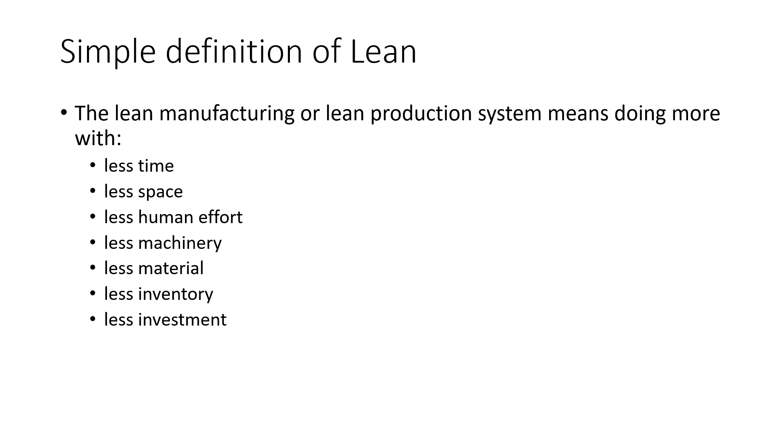So the key principles of lean: value. You define value from the customer's perspective. You identify the value stream. Value adding activity, eliminating waste, which is muda. It's a Japanese term, which means waste. So we're just trying to find ways to get rid of waste.

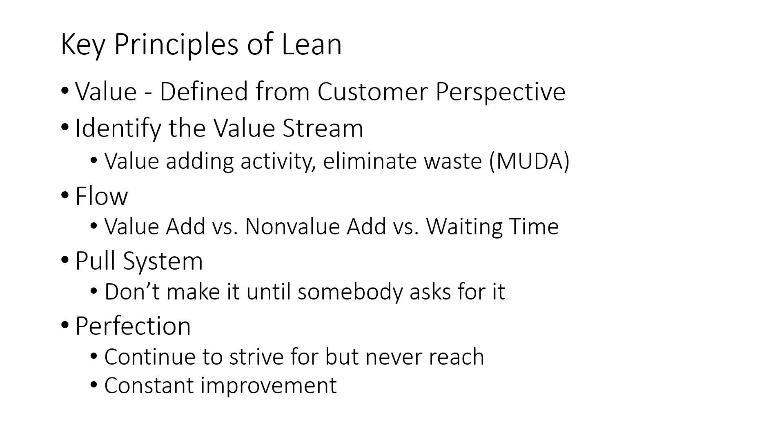Flow is how things move throughout the process. So you're looking for value add versus non-value add versus waiting time. Pull system, don't make it until somebody asks for it. And then perfection, continue to strive for it. You'll never reach it, but you're always in this constant continuous improvement Kaizen process where you're just always trying to get better. You're striving for perfection.

So just some differences between the conventional way of thinking and the lean manufacturing way of thinking, or the Toyota manufacturing systems way of thinking. Under the conventional, you're just trying to make numbers. You're trying to make as many as you can. You're in a push system. You just make more and more. You do what's ordered. The leader's the boss, so you do what the boss says. If there's standards, you're not sure where they are or if they're followed, or they might not even be clear.

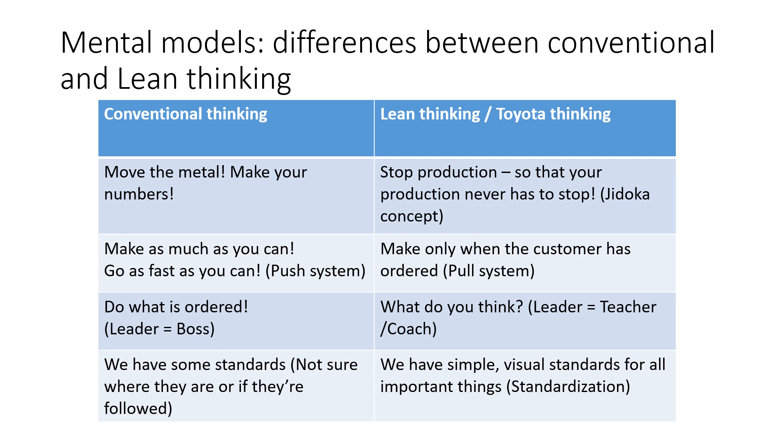Under lean, you're able to stop production so that your production never has to stop. You only make what the customer has ordered. You're in a pull system. So you may be asked, what do you think? The leader's a teacher. He's a coach. He wants your ideas, or she wants your ideas. And you want standardization, but you want the standards to be very simple, visual, so it's very clear and everyone can understand them.

So again, just the differences continued. Under conventional, engineers and other specialists create standards. They'll tell you what to do. You do what you're told. You don't want to get caught holding the bag. If there's a problem, you don't want to be the one that's around that problem. You don't want to be the one creating scrap or quality issues or whatever. Only grunts go to the shop floor. You won't see leaders on the floor, and it's just do. You do what you're told.

So again, under lean thinking, people closest to the work develop the standards. Who knows it better than the operator? So you want the operator involved. Involvement is very, very key. You want to make the problem visible. You want to go to the floor and see for yourself. If there's issues, you're not going to know unless you can see the problem for yourself. And then you're always in this PDCA cycle. You're in the plan, do, check, and adjust cycle.

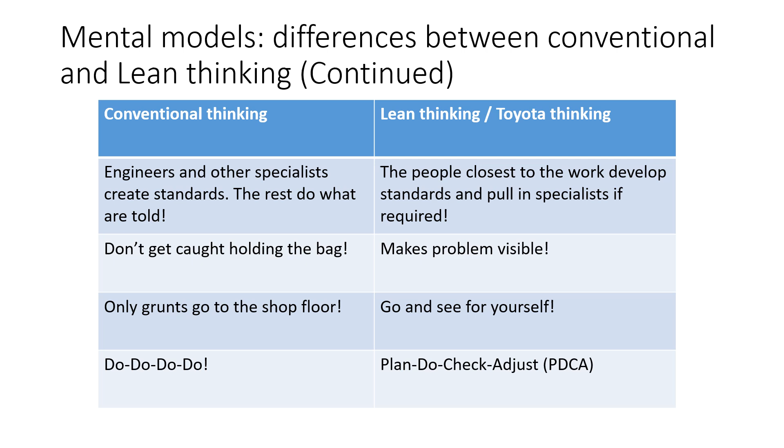So the basic image of lean production: the foundation of the lean system is stability and standardization. The walls are just in time, which is delivery of parts or products, and Jidoka, automation with a human mind. The roof, or the goal of the system, is customer focus. You want to deliver to the customer with the highest quality, with the lowest cost, and the shortest lead time. And the heart of the system is involvement. Everyone has to get involved to be successful. So flexible, motivated team members are always trying to find a better way.

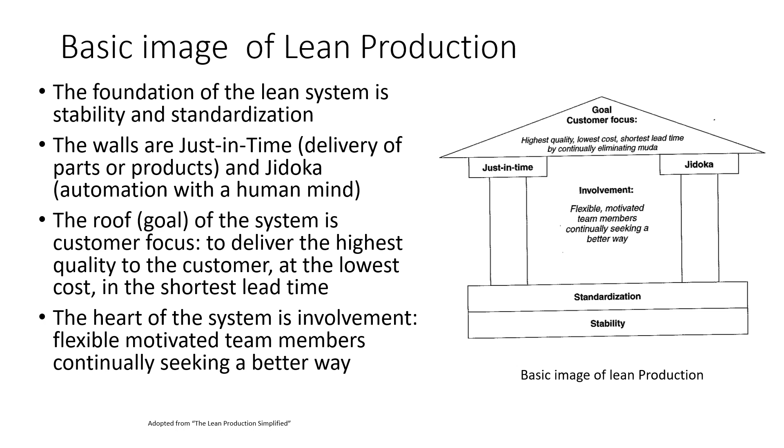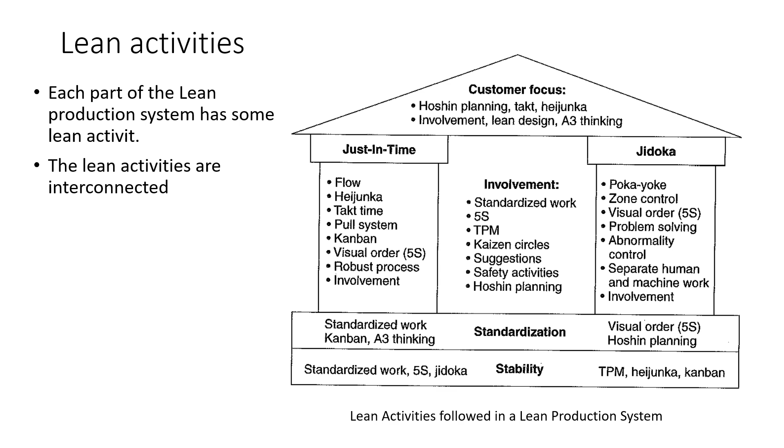So for lean activities, each part of the lean production system has some lean activity and they're interconnected. So again, customer focus has hoshin planning, takt time, Heijunka, there's involvement, there's lean design. Just in time, there's flow, Heijunka, takt time, pull system, Kanban, visual, everything's visual, 5S. In the heart, involvement. Standardization, 5S, TPM, Kaizen, suggestions. Jidoka, Poka-yoke, zone control, visual orders, which again, 5S. So you can see how everything is very much interconnected.

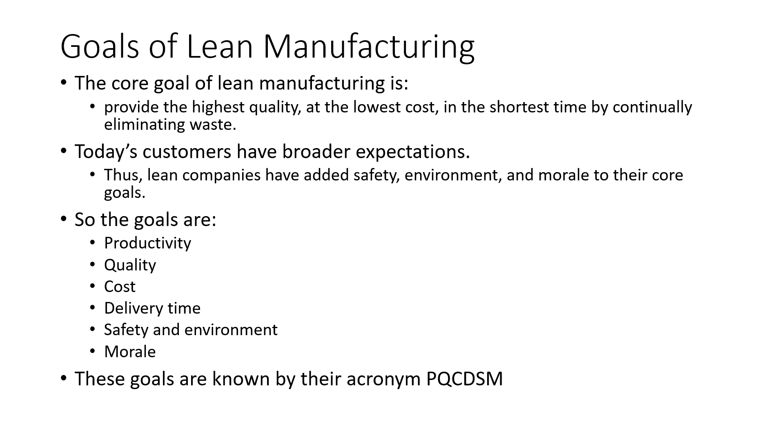So the core goal of lean manufacturing is to provide the highest quality at the lowest cost and the shortest lead time by continually eliminating muda or waste. Today's customers have broader expectations. Therefore, lean companies have added safety, environment, and morale to their core goals. So goals are productivity, quality, cost, delivery time, safety and environment, morale. It's most commonly known by an acronym PQCDSM.

So regarding customers, you need to know your customers, your external and your internal customers. You need to be able to talk to your customer. And you need to identify what your customer's value is and measure the delivery of the value to your customer.

So when it comes to customers, you need to make sure that you don't assume that you know everything about the customer. Don't ever assume that you already know what the customer wants. Don't assume that marketing or salespeople know the customer. Customers' requirements will always change. They'll change over time, and we need to monitor what they always need, and we need to track that.

And you need to understand why the customers do what they do. You need to know what drives them. You need to ask them directly, and don't assume you already know.

So ask the customer 3 questions. What do you want to know? Who do you want to know it from? And what are you going to do with the information? If you can't answer 3, you should not bother asking 1 or 2.

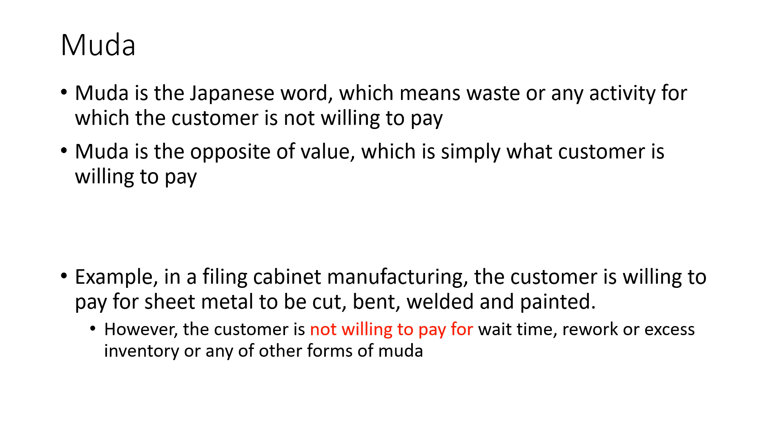So what is muda? Muda is a Japanese word which means waste or any activity which the customer is not willing to pay for. It's the opposite of value. Customers will pay for value. So an example, in a filing cabinet manufacturing, the customer is willing to pay for the sheet metal to be cut, bent, welded, and painted. However, they are not willing to pay for wait time, rework, excess inventory, or any other forms of muda.

So lead time is the time between the customer placing and receiving the order. So any delays could increase lead time. So lead time is equal to processing time plus retention time. Lead time increases the retention time, which far exceeds processing time in most manufacturing operations.

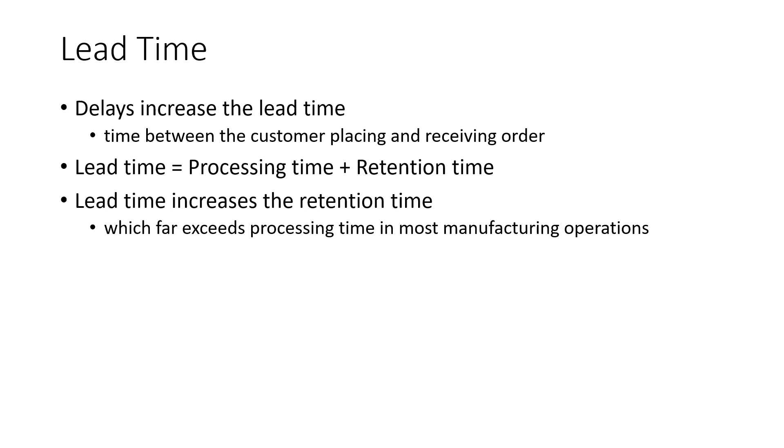So overproduction means making things that don't sell. Examples: building and maintenance of large warehouses, extra workers and machines, extra parts and materials, extra energy, oil and electricity, extra forklifts, tow trucks, pallets and skids, extra interest payment in the loans, and hidden problems.

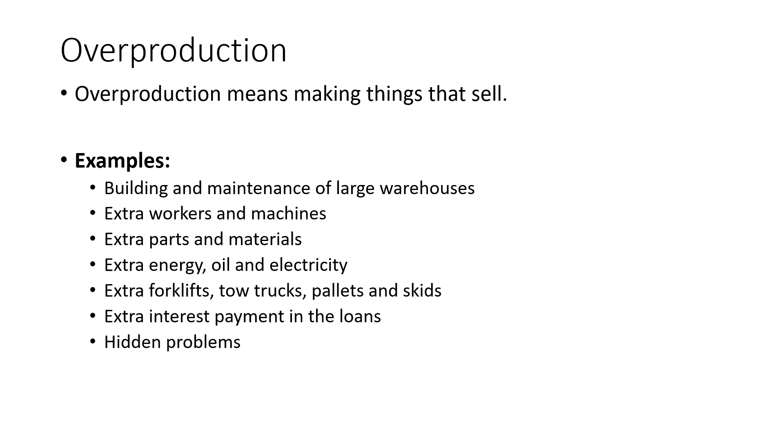So you can see in the chart the summary of all the different types of waste. There are usually 7 types of waste listed, which is overproduction, transportation, motion, waiting, processing, inventory, and defects.

Some people even list an eighth waste, which is not involving the operator or getting their ideas from the operator, and leaving good ideas on the table. So that's also considered a waste in a lot of lean books or articles that you may read. But you can just read along, go through the table and see the definition of each, examples, and causes and countermeasures.

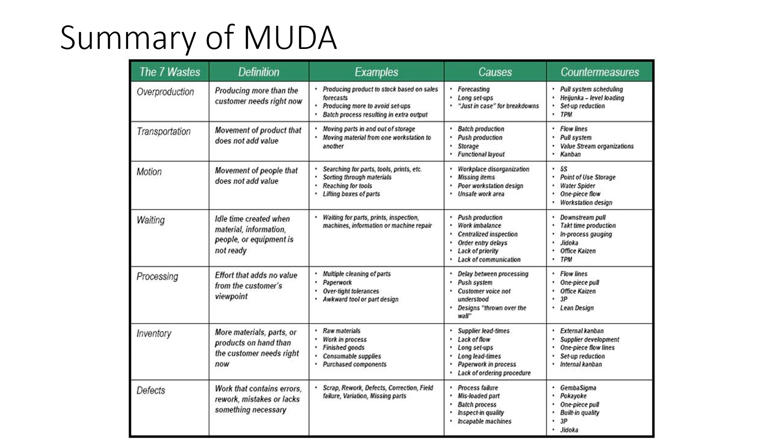So Mura refers to unevenness or a fluctuation in work, which is usually caused by fluctuating production plans. So an example is a production line that is producing difficult models for half the shift and simple models for the second half. So the workers strain for half the day and then they coast the other half. So in lean manufacturing, the lean production system seeks to reduce Mura through production leveling and mixing models.

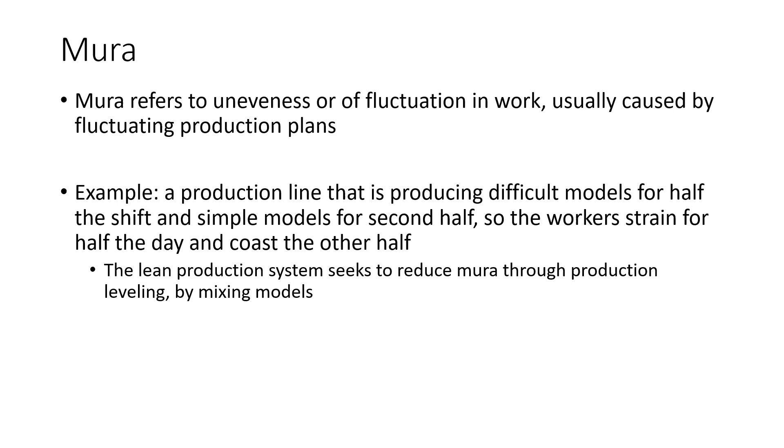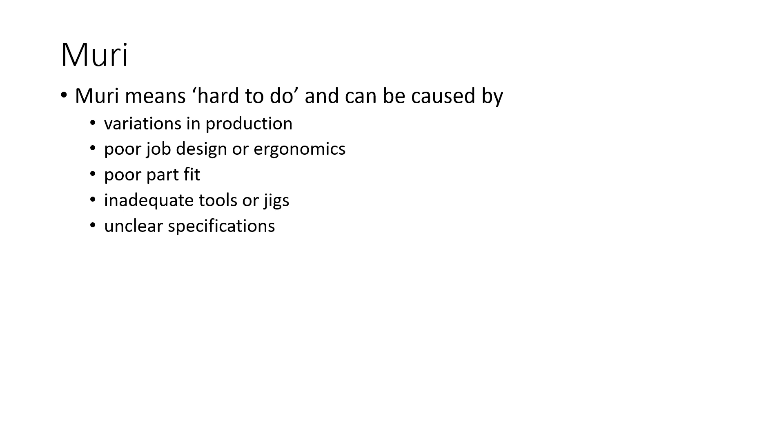Muri just means something that's hard to do, and it can be caused by variations in production, poor job design or ergonomics, poor part fit, inadequate tools or jigs, or unclear specifications.

So just taking the example of what's the best way to move a 6,000 kilogram load with a forklift having a capacity of 2,000 kilograms. So muda, or waste, would be 6 trips at 1,000 kilograms. So you could have made fewer trips because the capacity is 2,000 kilograms. Mura, or unevenness, 2 trips at 2,000 kilograms and 2 trips at 1,000 kilograms. So there's 4 trips there, and it's uneven each time. In the 2 examples, you're not using the same amount each time.

And then Muri, something's hard to do. 2 trips at 3,000 kilograms. You could probably make it work, but the capacity of the forklift is 2,000 kilograms. So you also could be putting the forklift driver in danger. It could be a safety issue. So the best would be just 3 trips at 2,000 kilograms.

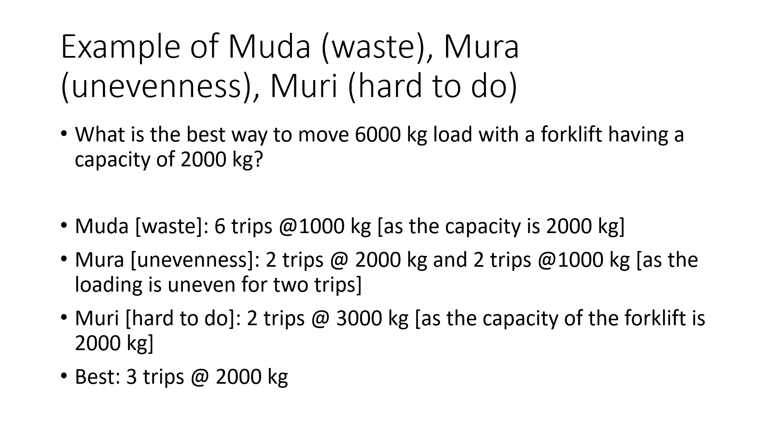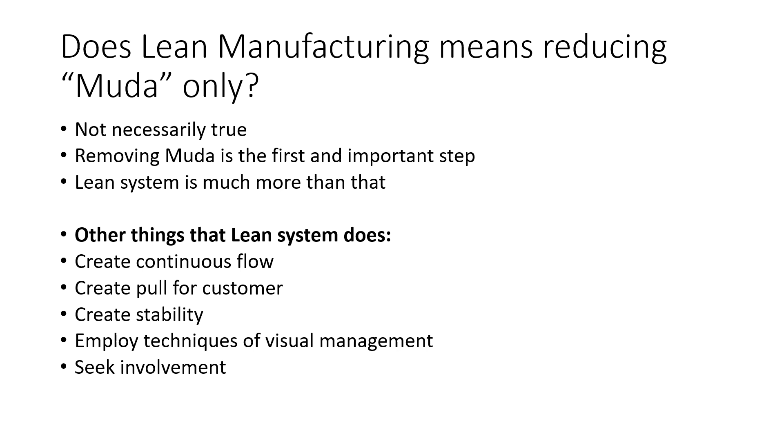So a lot of people indicate that lean manufacturing means reducing muda only, and even I'm guilty of saying that a lot of times, but it's not necessarily true. So removing muda is the first and important step, but the lean system is much more than that. So other things that you're doing within lean, you're creating continuous flow, you're creating a pull system for the customer, you're creating stability, you're employing techniques of visual management, and you're seeking involvement from everyone.

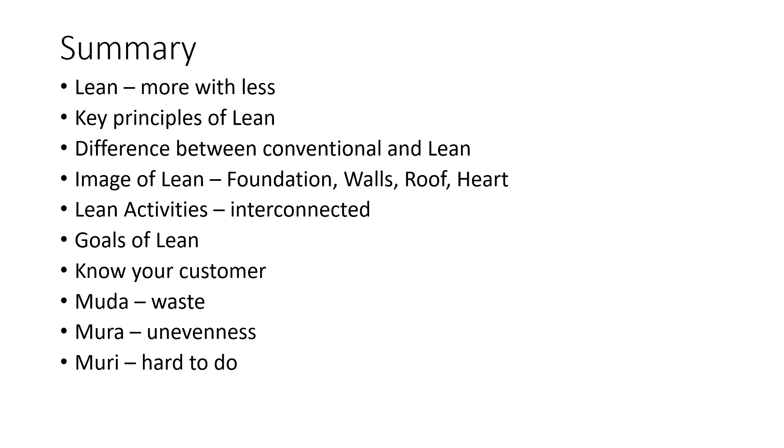So in summary, in lean, you're just trying to do more with less. So you need to understand the key principles of lean. You need to understand the difference between the conventional way of thinking and the lean way of thinking. Know the lean house, that image, the foundation, the walls, the roof, the heart of the house. Understand that all lean activities are interconnected. Understand the goals of lean. Make sure you know your customer. And again, muda is waste, mura is unevenness, and muri is hard to do.